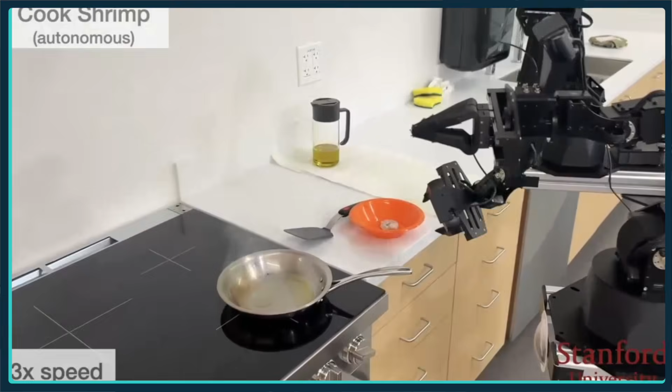I'm going to show some skills that the robot learns to do autonomously. So the first one is cooking. The robot can actually cook the shrimp.

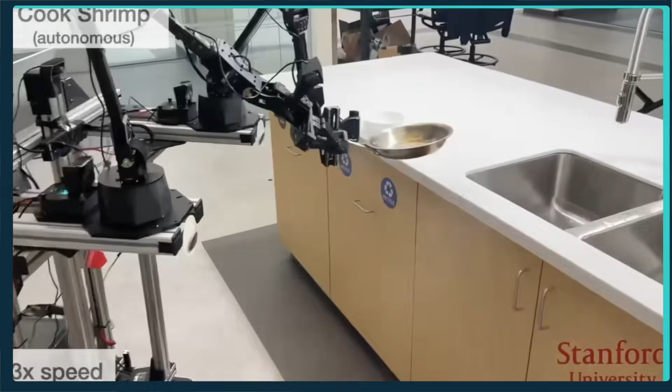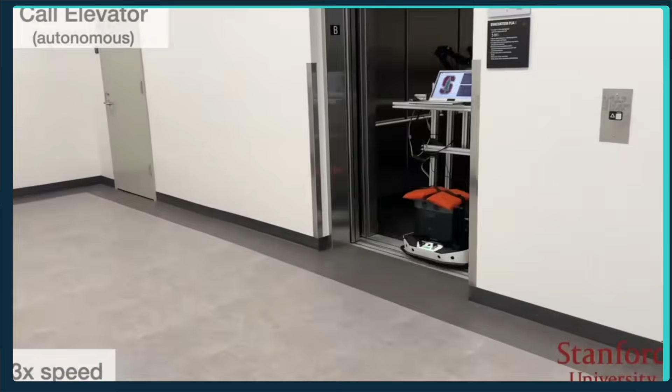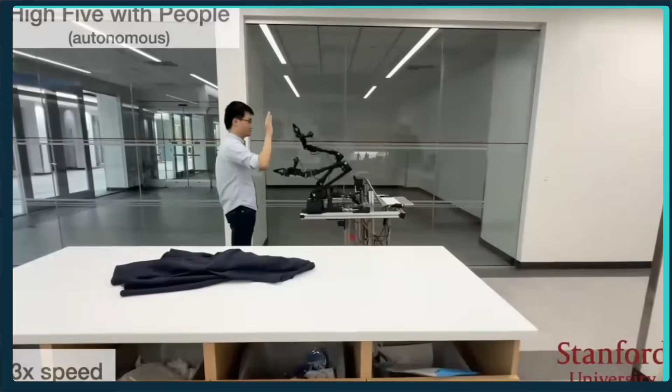It also learns to navigate to an elevator, go inside, and press the buttons. You can also deal with liquid, which is transparent, and do the wiping. You also can interact with humans. In this case, we're playing high fives with the robot.

Today, I'm going to talk about advances in using machine learning to make better robotic systems. I'll focus on two systems: one is robot parkour, the second one is Mobile ALOHA.

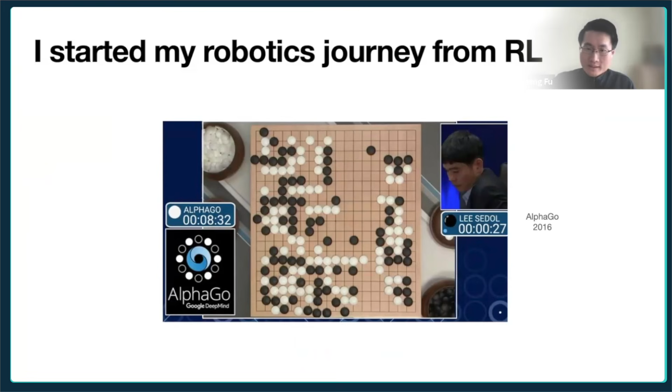Like many people, I was impressed by the performance of AlphaGo, how a software system can be designed to learn from a massive amount of trial and error without too much programming. That's where I started my robotics journey, from reinforcement learning. But reinforcement learning in the real world can be tricky.

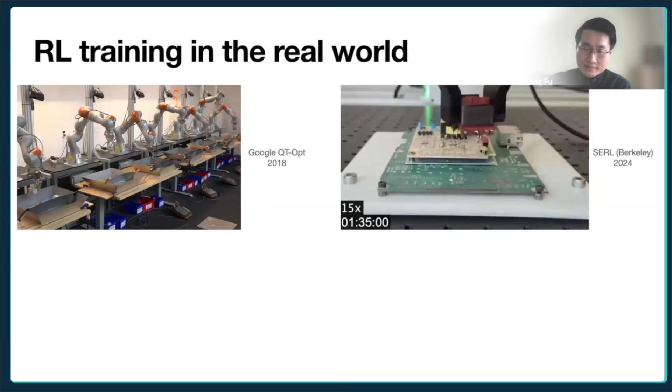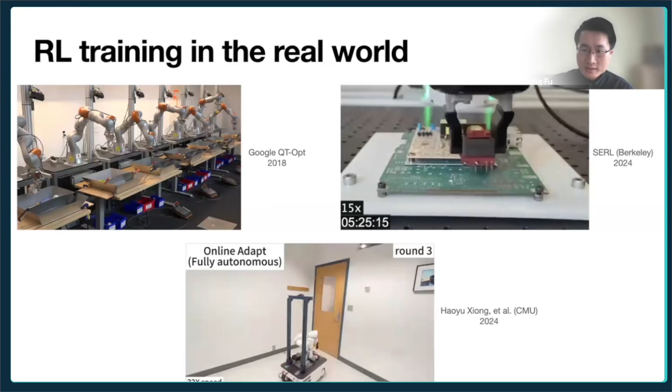We have seen that people have tried to make progress by using reinforcement learning training and then deploying it directly in the real world. There are many recent advances in this domain, including PCB insertion and also mobile manipulation.

But there are many limitations. Usually people restrict the observation space and action space in order to make reinforcement learning in the real world work, because of the sample efficiency problem, and also because trial and error can break things, and it's usually pretty slow. At the same time, simulation is getting better.

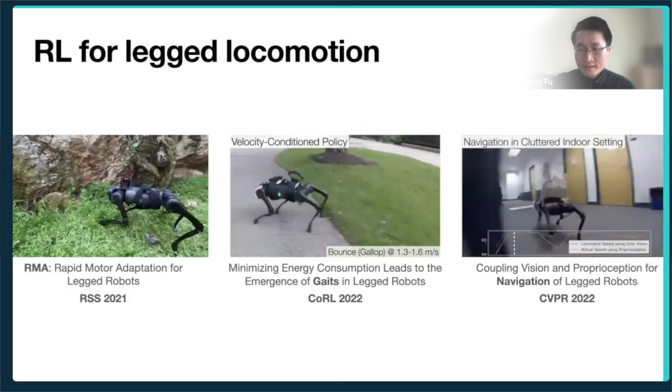In the past, I've tried using reinforcement learning for various tasks like locomotion, including training adaptive policy for robots, and also using reinforcement learning to get different gaits of legged robots, and combining vision and proprioception for the navigation of long horizon tasks for legged robots.

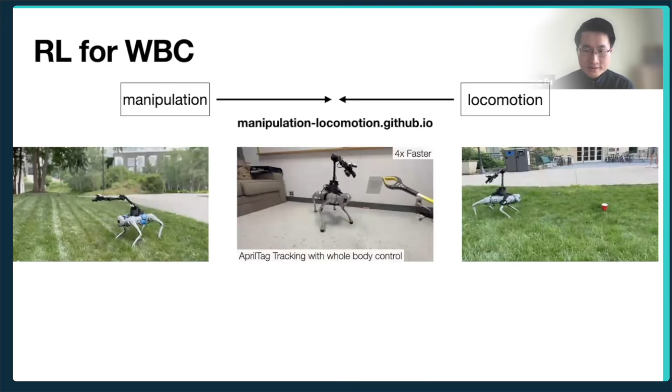Reinforcement learning can also be used to train robot dogs with arms attached on the back, so they can do these kinds of whole body tasks.

The first robot learning system I'm going to talk about is robot parkour learning. So why are we concerned about parkour? Isn't walking robots good enough? We think it's not enough.

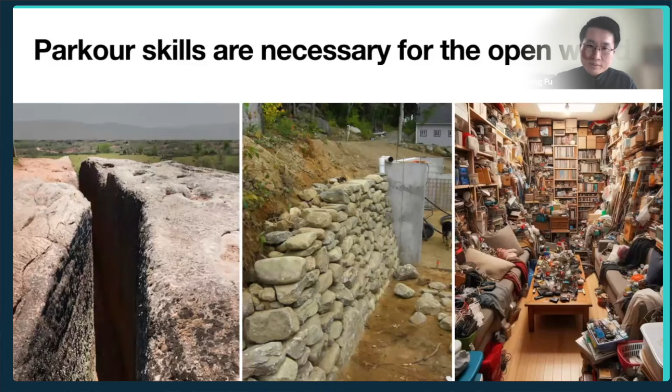Because we think parkour skills are actually necessary for the open world. There are many real world scenarios that require robots to achieve this kind of extreme agile skill in order to overcome these kinds of environments in the open world.

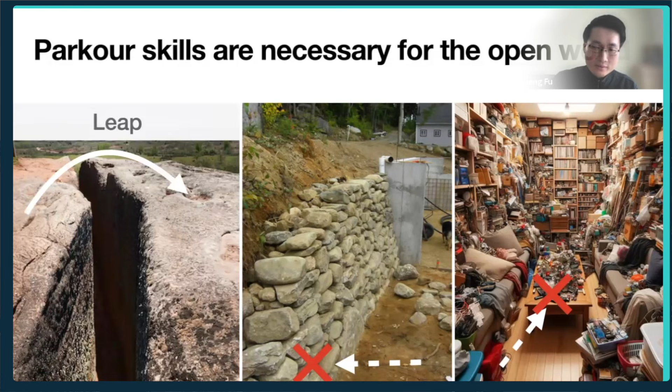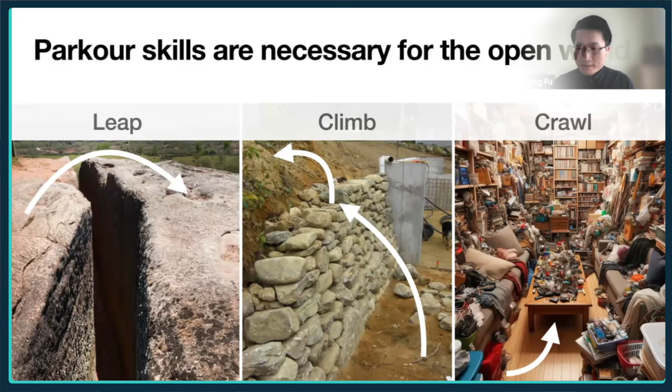So on the left, if the robot can leap, it can leap over the gap. If the robot can climb, it can overcome this kind of high barrier. And even indoors, if the robot can crawl, in this case, in a cluttered indoor environment, the robot can go beneath the coffee table and reach the other side.

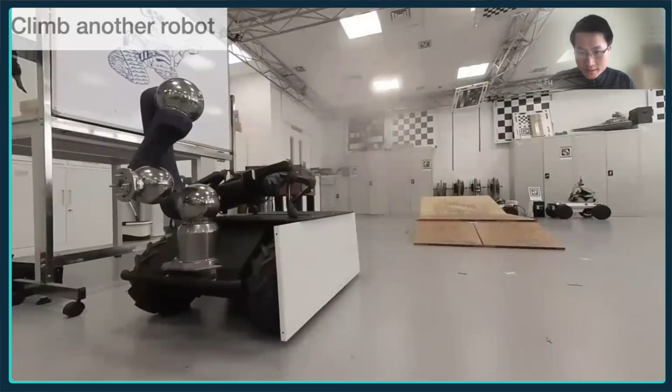I'm showing some examples of the behavior here. This one is leaping. The robot can also climb another robot. It can also do this kind of crawling behavior. Because it's using depth information, it can also climb in low light.

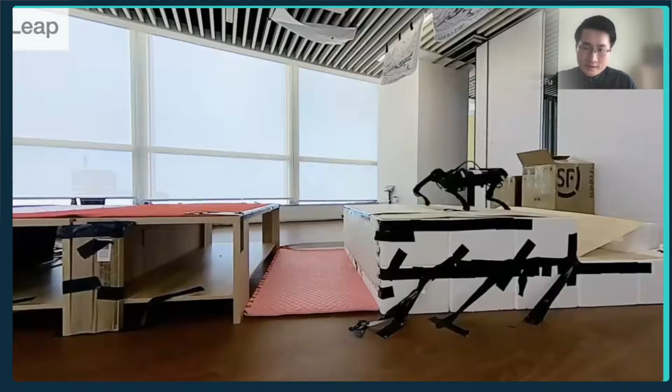Here's another example. It can also tilt itself to squeeze through narrow passes, shrinking the width of the robot to pass through a pretty narrow gap.

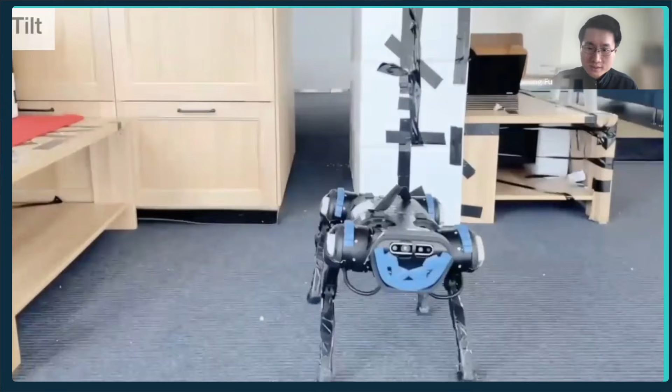Because of that, it's kind of not scalable to training all the parkour skills at once. If we want to get five or six parkour skills, we'd need to design five or six sets of this kind of heavy reward engineering scheme, which is pretty hard and not scalable.

So we're thinking about how to solve this in a scalable fashion. One inspiration we take is from a classical method called the direct collocation method.

By default, in simulation, we ensure that the robot follows a hard dynamics constraint, meaning the robot should not penetrate these kinds of obstacles. But with our pipeline, which uses reinforcement learning with a soft dynamics constraint, the robot can actually penetrate obstacles because we don't enforce the hard dynamic constraint, but instead let the robot have a soft dynamic constraint with the environment.

Concretely speaking, the robot can softly penetrate the obstacles, and we penalize that. If the robot penetrates the obstacles where it shouldn't be, we penalize the penetration by specifying a reward term. We measure the number of penetration points, which we sample on the collision bodies of the robot.

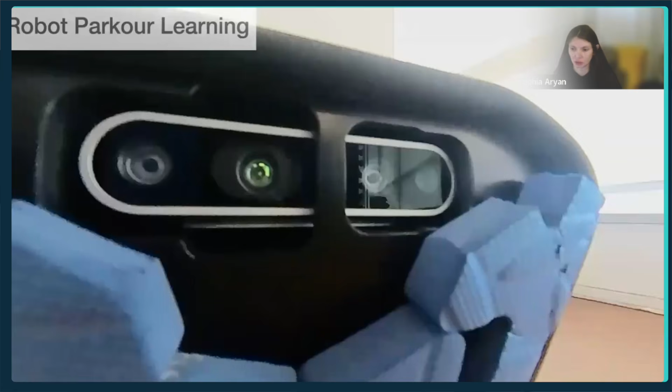Zipeng, I see a question: Does the robot not get climbing with soft physical constraints because you can't model gravity properly with soft physical constraints?

I think that's true because with the soft constraint, the robot cannot actually use the top surface of the obstacle as a standing point to support itself. But after fine tuning it, it gets to use it.

Just to clarify that I'm also following this - you guys do this in simulation, and then you try it on the real world, and that way you collect the data samples and you fine tune. Is that right?

No. Everything is done in simulation. The fine tuning is also done in simulation. We turn off the physics during the first stage and turn on the physics during the second stage of fine tuning. In this fashion, we relieve ourselves from heavy reward engineering, because the first stage is pretty easy to solve gradually, and the second stage, although it's pretty hard to solve, is pretty easy to solve with the initialization from the first stage.

I see the follow-up question to the previous one: What if you allowed the agent to choose hard or soft constraints in the environment? That's a good idea. We haven't tried it, but maybe it should work.

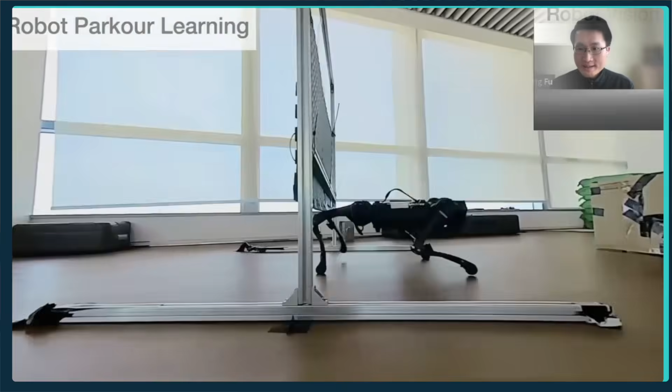We deploy this aggregated policy on a real robot, and as we can see on the top right, it's a vision of the robot which is depth, and the robot can do all the skills at once.

We also did some quantitative studies on our policy in the real world. The robot can actually climb an obstacle that is higher than itself and leap over gaps that are longer than the body length of the robot, crawl beneath obstacles that are lower than the robot's height, and tilt to squeeze through narrow passes that are actually narrower than the robot's width.

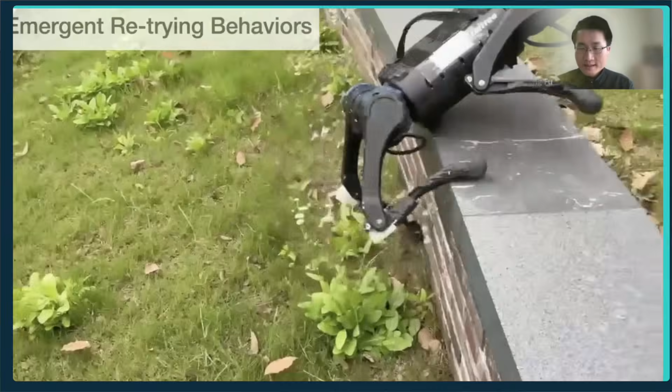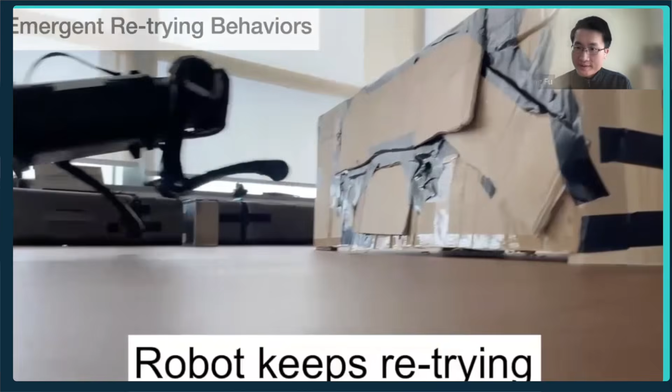By using parkour skills, the robot can be much more powerful. We're also seeing, because we are using one neural network that takes images as input and outputs the action, running at high frequency, the robot can actually have some retrying behaviors. If the robot fails at the first attempt, it will push itself back to increase the clearance, to have a larger run-up space for the subsequent trials.

We open source everything, including the training code, the simulation code, and hardware code, and also the checkpoint weights of our neural network on GitHub. We did a live demo at CoRL last year, and it's pretty fun.

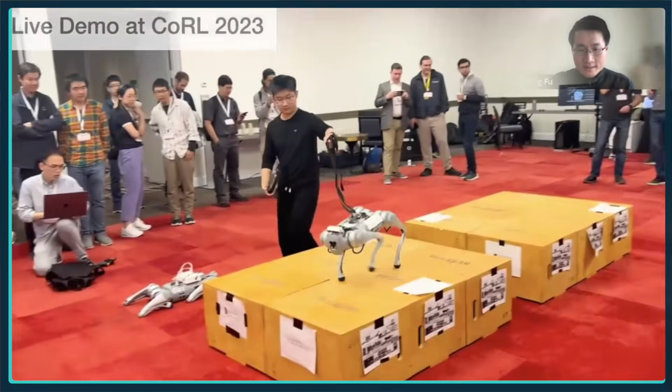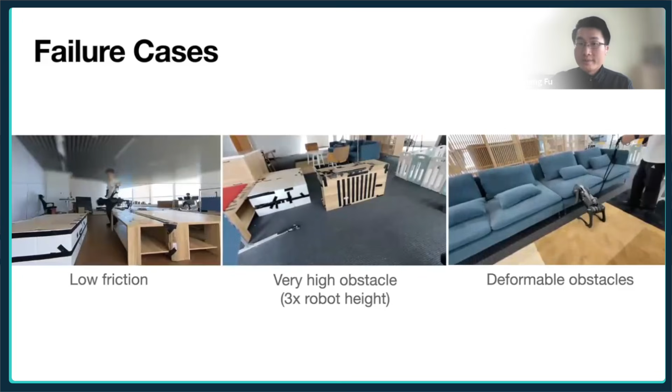There are many failure cases. If the robot is trying to leap on low friction surfaces, it cannot really leap over a large gap. If the obstacle is pretty high, then it cannot climb it, mostly due to the limit of the motor, because it cannot exert forces large enough to push the robot up that high. And because we are using a rigid body simulator, it is pretty hard for it to deal with deformable objects.

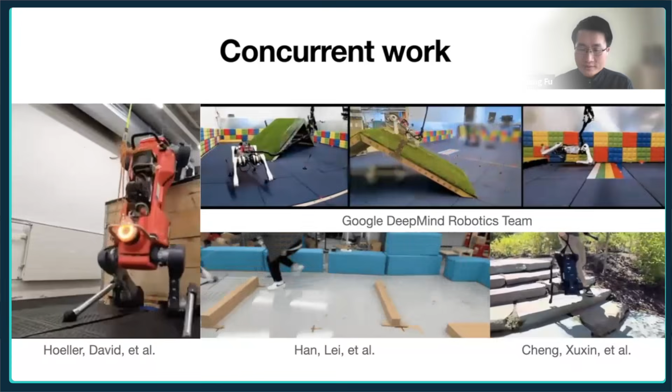These are concurrent works where people also tried to learn parkour skills. Feel free to check them out. These are pretty good work, and a lot of different kinds of skills have been shown in these works. This is their website.

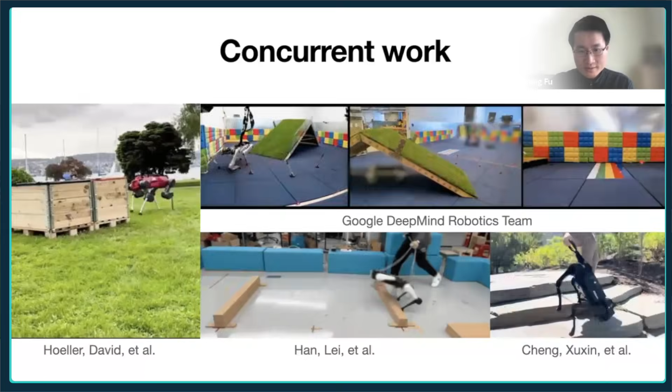Parkour and locomotion is pretty fun to work with. But is there a way to make the robots useful, especially the mobile robots? One direction we can try is to put an arm on top of the robot and make the robot solve mobile manipulation tasks.

So if you're trying to do manipulation, can we use simulation? Usually manipulation requires semantic information, which cannot just rely on RGB, cannot just rely on depth information or point cloud, because these are mostly geometric information. Also in simulation, soft objects are pretty hard to handle.

There are many efforts at NVIDIA trying to push in this direction, trying to reproduce all the semantic information, RGB rendering, and soft object rendering in the simulator.

People teach robots to do all kinds of manipulation tasks by using human demonstrations collected directly on a robot. People are starting to think that maybe if we have lots of demonstrations, basically lots of data to supervise training the robots, maybe we can solve robotics in one day.

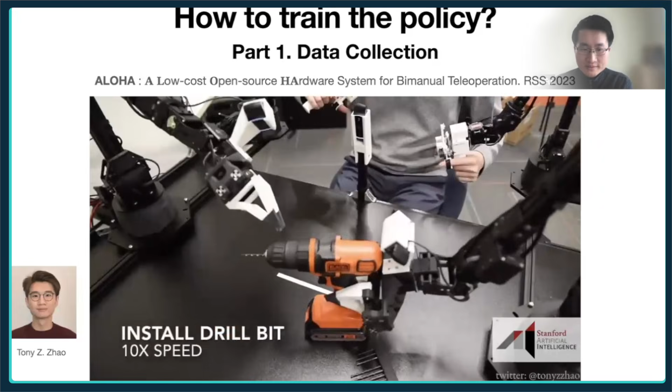We have seen a lot of progress in this domain. This is a project called ALOHA, led by Tony, where a pretty low cost hardware system can be used to accurately teleoperate the robot to collect human demonstrations for robots. It's also a bimanual setup.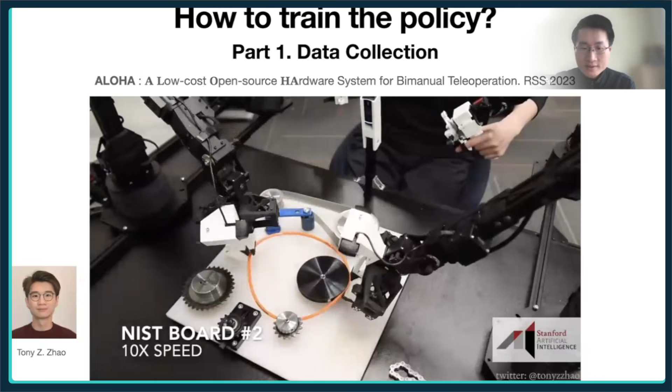One key idea that's pretty important in both papers is that people are using action chunking — a technique where instead of predicting one action at each time step, the policy predicts a short sequence of actions for the robot to execute into the future at once. By that, a 2 Hertz policy inference, with an action chunking size of 25, can lead to a 50 Hertz control. This shrinks the long horizon problems in manipulation by a pretty large factor.

One idea I had in the past is maybe we can just use ALOHA as a platform and make ALOHA movable — so Mobile ALOHA — and put the ALOHA setup on a mobile base and use it for mobile manipulation. This leads to the project called Mobile ALOHA, where we're trying to build bimanual mobile manipulation setups.

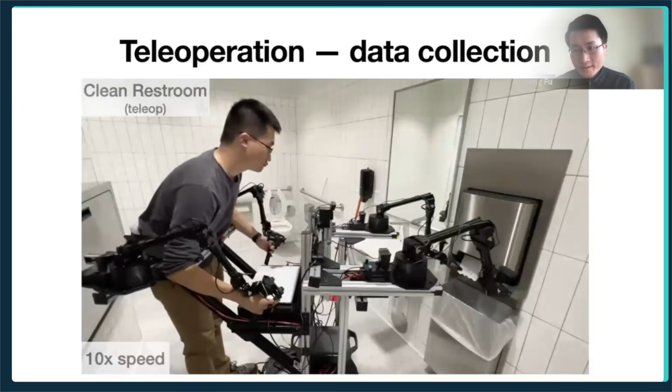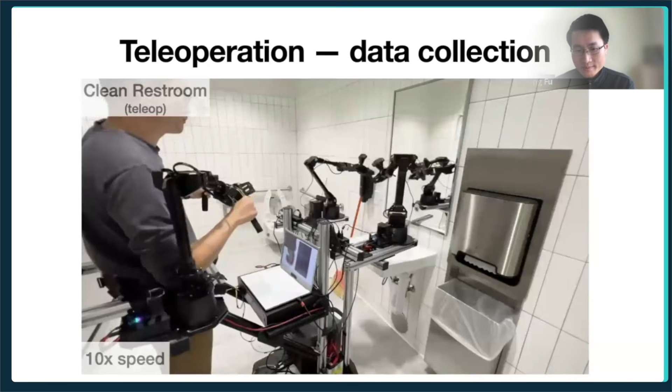So this is the robot that we built. By mounting the Aloha setup on a mobile base, and also tethering the human to the mobile base, we can collect the whole body motion data, including the motion of the arms of the human, and also the motion of the base of the human.

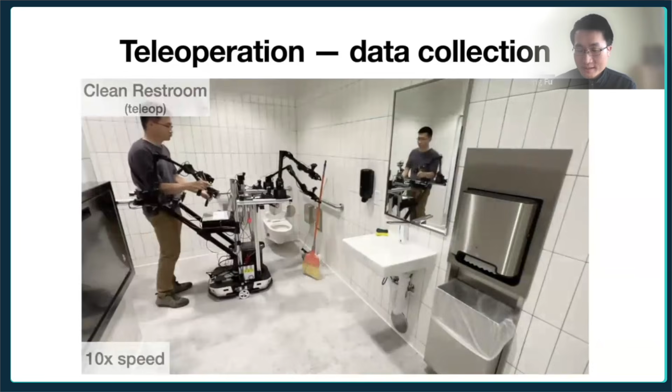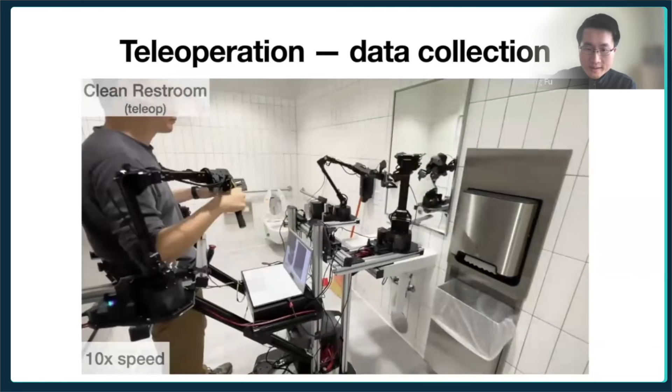So it can record the speed of me moving forward and moving angular, and also the motions of the arms. Everything is on board. The robot is not tethered to a cable, so it can move freely.

How many hours did you spend on this? Just basically, what is the reasonable size of data samples you guys need?

Yeah, we will talk about this. So basically 50 samples for each task. We found that's pretty good enough with a technique that we'll introduce later.

So this is the data collection pipeline. On the left, we're showing the teleoperation phase. We attach the leader arms that the humans use to puppeteer the front 2 main robot arms. But during deployment, everything is just controlled by a neural network, so we can remove the second half of the robot, making it more compact during deployment.

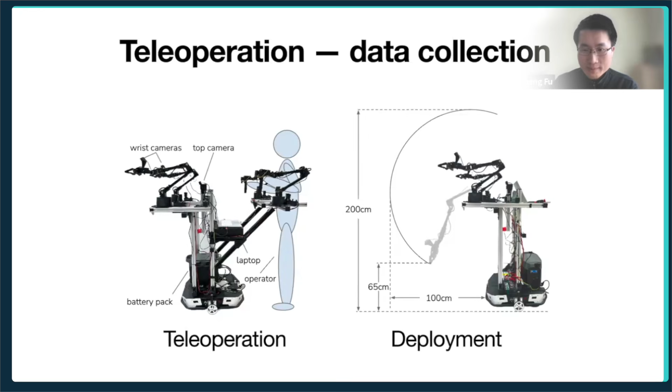Some key aspects: the robot has 14 degrees of freedom on the arms and 2 degrees of freedom on the base, for moving forward and moving angularly. The weight of the robot is 75 kilos.

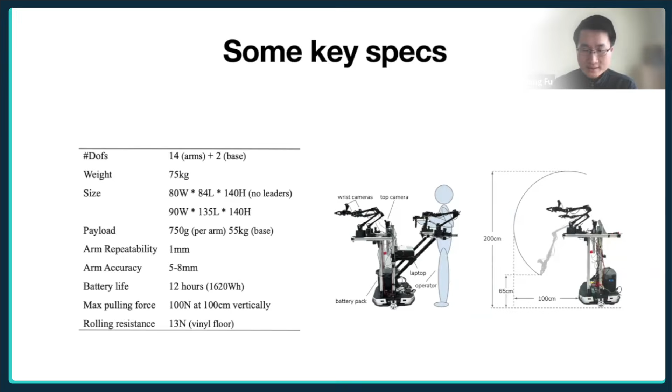Although it's pretty heavy, the resistance for the human teleoperators to push around the robot is pretty lightweight. We measured the rolling resistance on a normal floor, and it's just 13 newtons. We did some user studies.

We found that Mobile ALOHA is pretty easy or user friendly. We asked a bunch of people, 8 to 9 people, to perform a task, and they hadn't used the Mobile ALOHA setup before, so they had no prior experience teleoperating this robot. But after 5 trials, we found that the average time to complete the task was approaching the expert speed.

The expert speed in this case is the speed of me and Tony. So this shows that the Mobile ALOHA setup is pretty easy for people with no prior experience, and they can just pick up the setup and learn how to use it.

We open sourced the hardware, including the CAD design and how we found different parts. People are starting to use it and build different kinds of models from it. We don't have collaboration with any companies, but different robotic companies are selling their own versions of Mobile ALOHA, and many of them are selling a lot of orders worldwide.

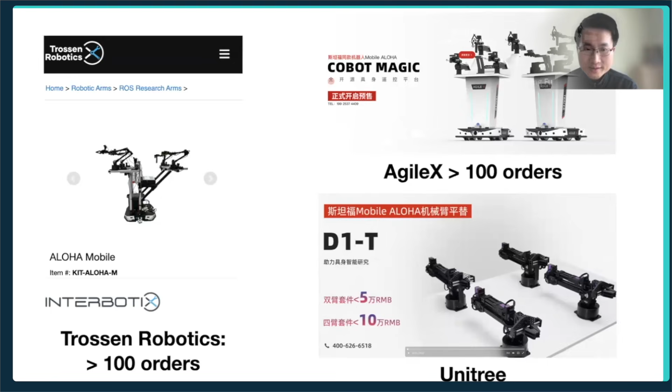I'm going to show some skills that the robot learns to do autonomously. The first one is cooking. The robot can actually cook shrimp.

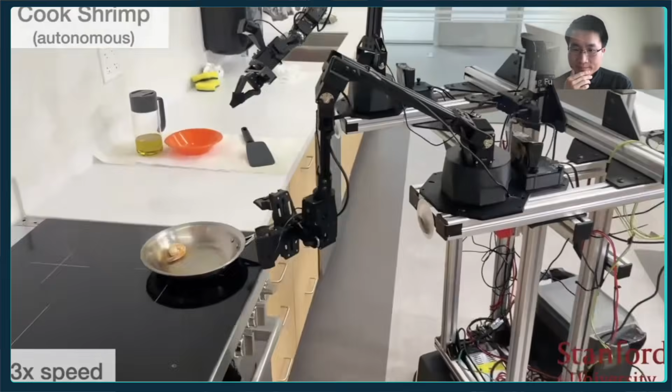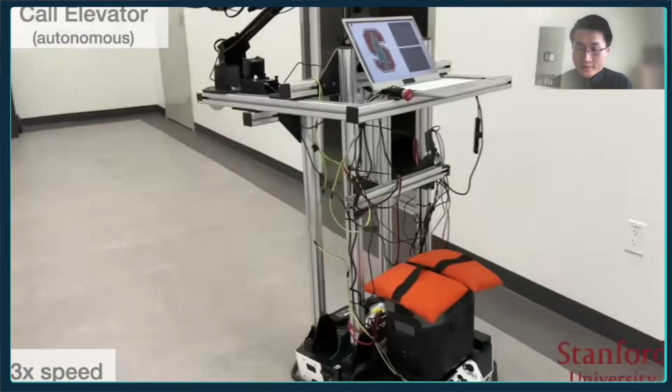It also learns to navigate to an elevator and then go inside and press the buttons.

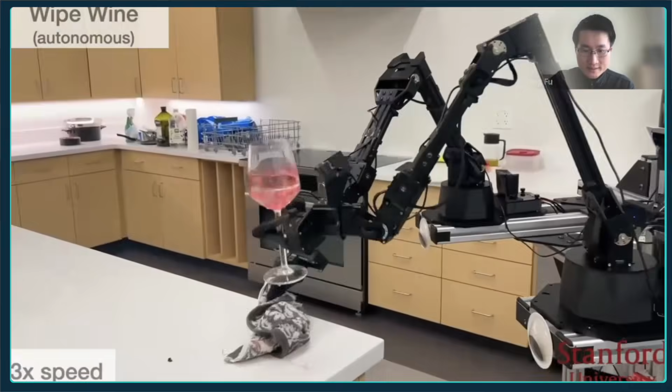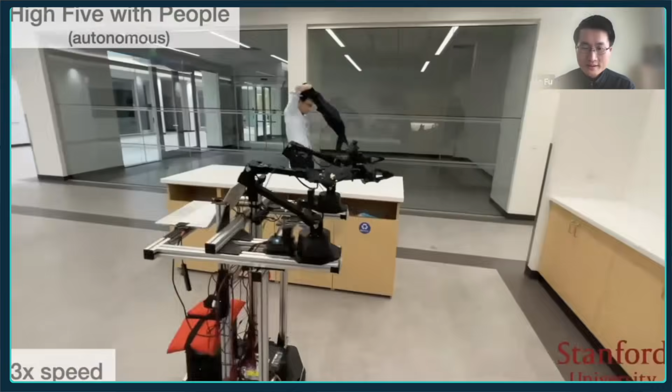You can also deal with liquid, which is transparent, and do the wiping. It can also interact with humans - in this case, we're playing high-five with the robot, and it's robust to different closeness and height of humans.

So we can rinse the pan.

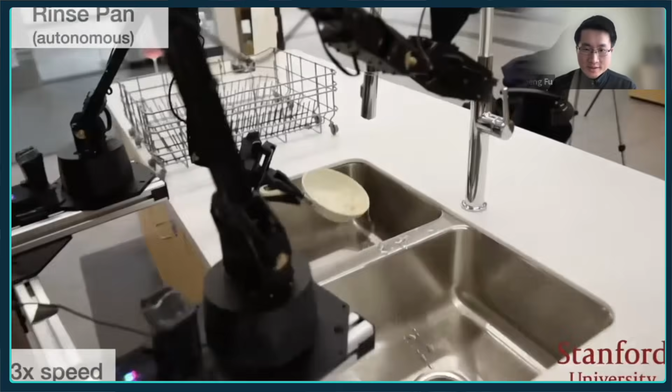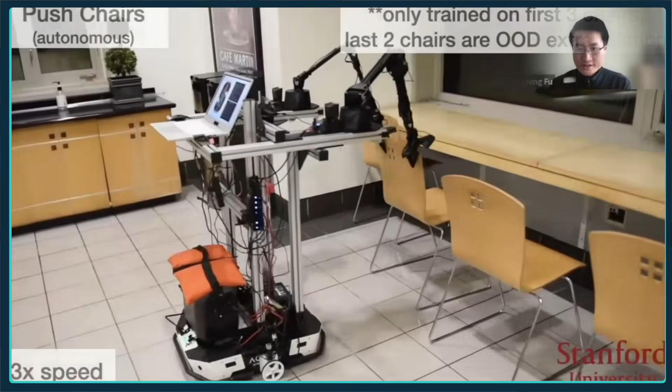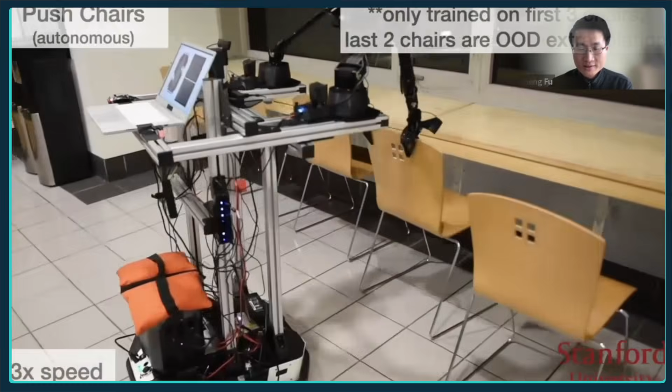This is an interesting task. We only collected data for the robot to push in the first 3 chairs, but surprisingly, when we deployed the robot, it tried to generalize out of distribution to the last 2 chairs, even though it hadn't seen those chairs during training.

It seems it did a good job, right?

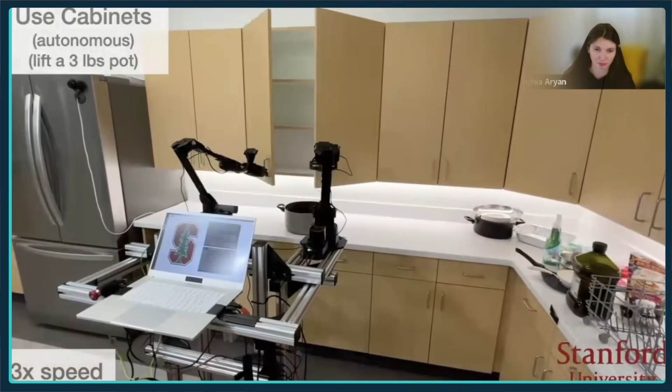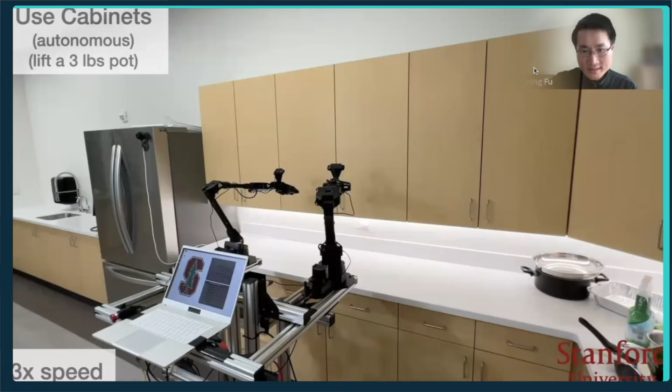Yeah, so we hope it can do that, but it's kind of surprising it can generalize to new distributions. It can also open cabinet doors and put a pretty heavy pan, in this case 3 pound pots, using its bimanual manipulation skills, and put it inside the cabinet.

So how do we achieve pretty good data efficiency? As we mentioned, we just use 50 demonstrations per task. We use a technique called co-training. Because we have a pretty large dataset for the static ALOHA, which is ALOHA mounted on the tabletop, we use that as a co-training term for the policy to generalize better.

So in total, we have 800 demonstrations from the static ALOHA dataset. Because the static ALOHA dataset doesn't include motion data, like the base of the static ALOHA is not moving, we just simply put zeros for the base action for that dataset. Surprisingly, it works pretty well at the first trial together with the Mobile ALOHA dataset.

For each task, we collect 50 demonstrations, and it takes usually half an hour to one hour for a human to collect the dataset for one skill for Mobile ALOHA. We found quantitatively that co-training improves the performance, especially for fine-grained tasks.

If I ask the robot to lift the glass and do the wiping, or ask the robot to turn on the faucet, these kinds of tasks require pretty precise action for the robot. Co-training helps complete these difficult tasks by a large margin.

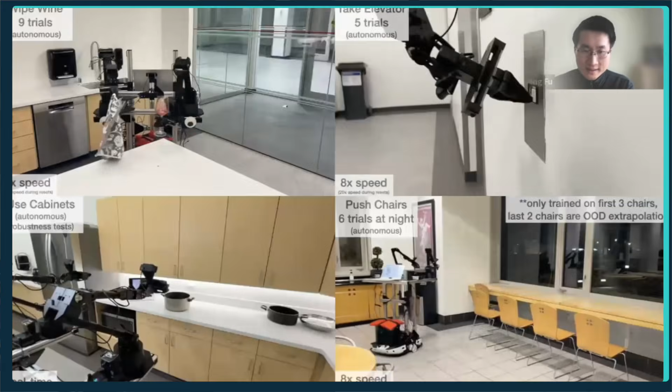After using this technique, the robot can robustly complete different tasks continuously. On the left, the robot can complete the wiping task nine trials autonomously, and the robot is trying to put the pot into the cabinet after opening it, pretty robustly, even though we threw all kinds of visual distractors into the scenes.

We release all the code, including the hardware code, which is for the data collection, and also the learning code. We put everything on GitHub, including the Git histories, so people can take a look and see what things we tried but failed.

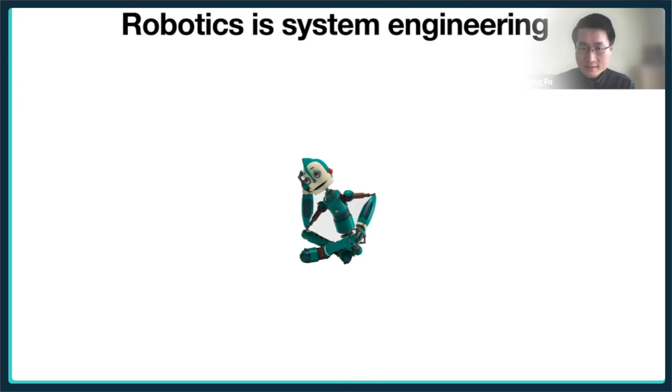In summary, these two projects made me think that robotics is like system engineering. It's not just perception, also the control part. And I have different tasks for robots, so the robot can move, the robot can manipulate.

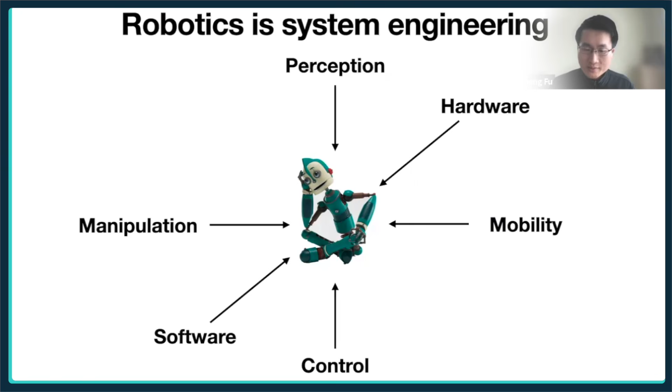Especially in the mobile project, we think hardware and software co-design, co-optimization are pretty important. Robotics definitely needs pretty good data engineering, where I've shown that simulation data can be helpful, and imitation learning using real world human data can also be pretty useful.

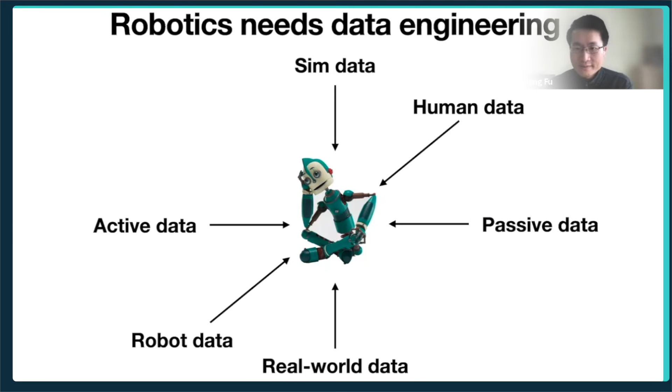Human demonstrations—there are also not just active datasets, but passive datasets people collected, for example on YouTube. We mostly focus on robot data for now, but there's a massive amount of data recording humans doing all kinds of stuff. If there's a way to utilize that, it would be super fun.

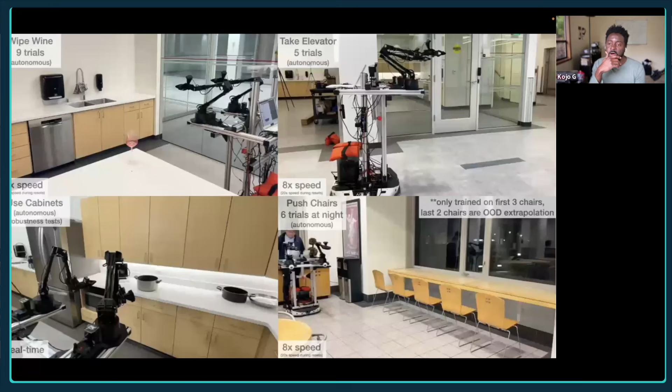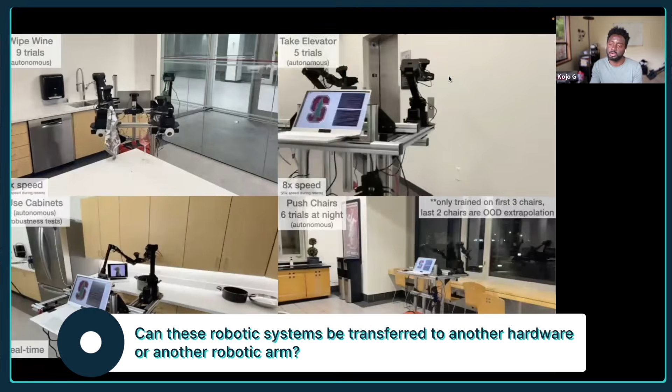I think my original question was answered, which is how robust is it to changes in the environment? I'm also wondering what's the level of effort involved to port this to different hardware that's not like the original, say different robotic arms than the ones you used?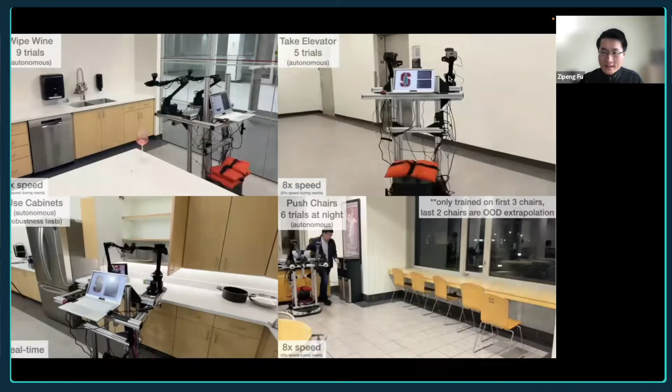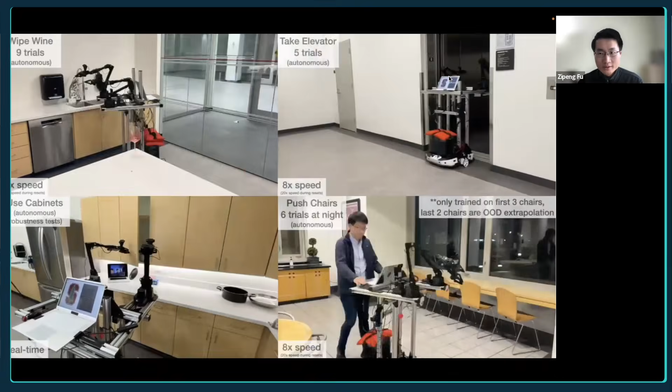It's kind of robust to visual distractors, but if we just try to put the robot, after training and data collection in one environment, and switch it to a totally new kitchen or environment, then I don't think it will work because everything is different - the floor, the environment, the objects, even the positions of different kinds of objects are different. So I don't think that will work. The robustness right now is kind of limited to visual distractors.

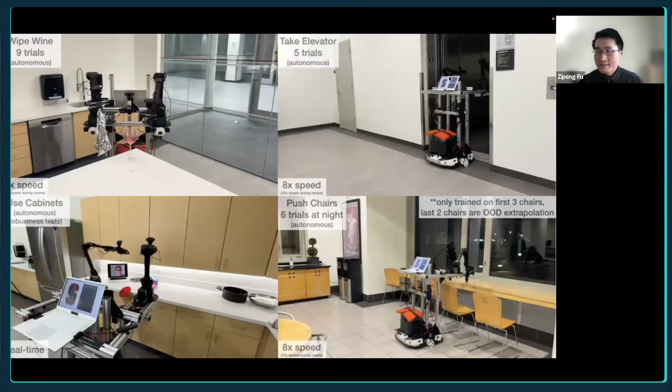And also for the second question, how this pipeline can be transferred to different platforms, different robots - we found puppeteering is a pretty important way to collect high quality manipulation data, in the sense that it allows us to accurately teach the robot by using the robot to collect the human demonstration. There's a project called GELLO that builds this kind of puppeteering teleoperation system for different robot arms, including the Franka Panda robot arms and the UR robot arms. Feel free to check that out. I think that will speed up the high quality data collection by a lot. The project is called GELLO, G-E-L-L-O.

Zipeng, I really appreciate the talk. I wonder if you're familiar with the laundry folding task. I know there was a Tesla video which was faked earlier in the year, and there's another contender that claims to have solved laundry folding called Eve. And just in general, what's your favorite really hard task that you have your goals set on?

So first of all, I think the Tesla demonstration is not fake - it's trying to demonstrate the hardware capability by using teleoperation. Even building the teleoperation system and the robots is tremendously hard, in the sense that you need to be accurate, need to be real time, and also transporting all the sensing from the robot to the humans - the visual delay should be very small in order to do pretty good laundry folding and stuff, including flaying the clothes.